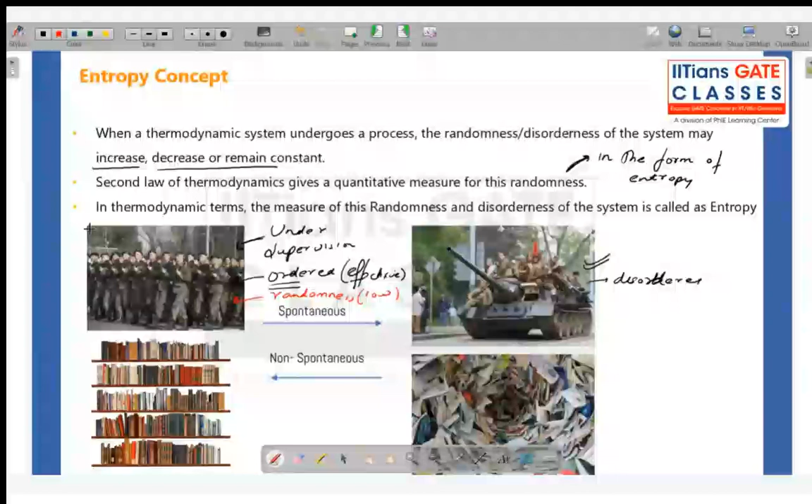But when this system — if I assume this is a system — and when I leave this system to do a natural process, so after the end of this process, the randomness increases. Randomness, random, okay, just one second. Randomness increases. So you see, after any natural process, whenever a system goes through a natural or spontaneous process, its randomness increases.

So it becomes less effective. It becomes less effective, okay. After a process, when its randomness increases, it becomes less effective.

Now also, you see, if it is a bunch of books — someone has put enough work to arrange this book in a very particular order. So here the randomness is really low, okay, so this system is very effective. If you just walk into this library and you know that you want this book, for example, you want the book The Alchemist, okay, so what you will do — you know what kind of genre it is.

You will go to that genre, and then alphabetically you can choose this particular book. But now, if I leave you in this library for 1 year without any supervision, naturally what will you do? You will pick up a book, throw it somewhere. You will pick up another book, throw it somewhere. So after 1 year, naturally, what will happen? Spontaneously, you will come from this stage to this stage.

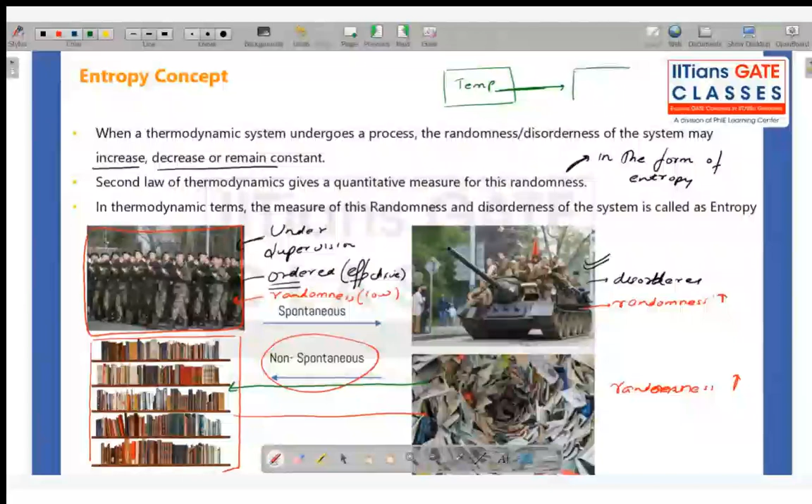But now, let's say it undergoes a process. Here you have taken out some work, but after this process, its randomness or entropy increases. That means now, because randomness has increased, higher entropy means less work output, less effective energy, less effective system. If I say a system has higher randomness, that means the molecules are very randomly arranged. There is no particular order. There is very high disorderness, and therefore it's really difficult.

So what is randomness? Look, this is one system, and all the molecules are arranged like this, maybe a little bit like this, little bit like this. Basically they are all arranged in a particular order. But if you have a system something like this, one molecule is like this, one is like this, one is like this - here molecules are very randomly arranged. So this is higher randomness, means higher entropy, means less effective energy. Here randomness is low.

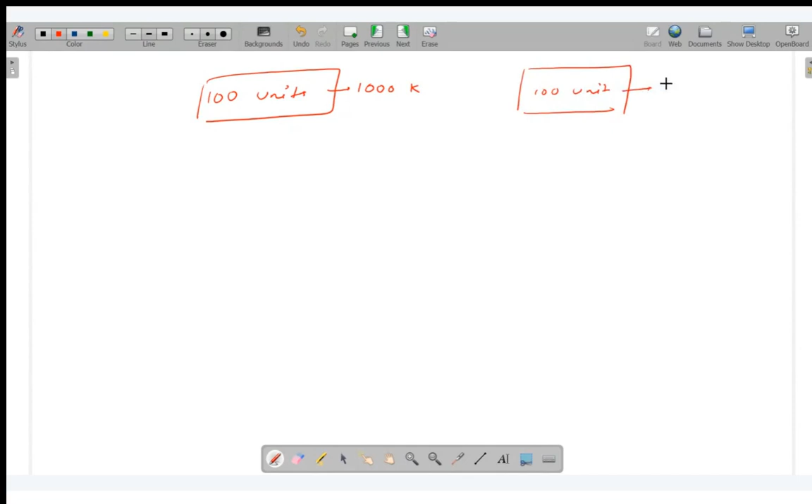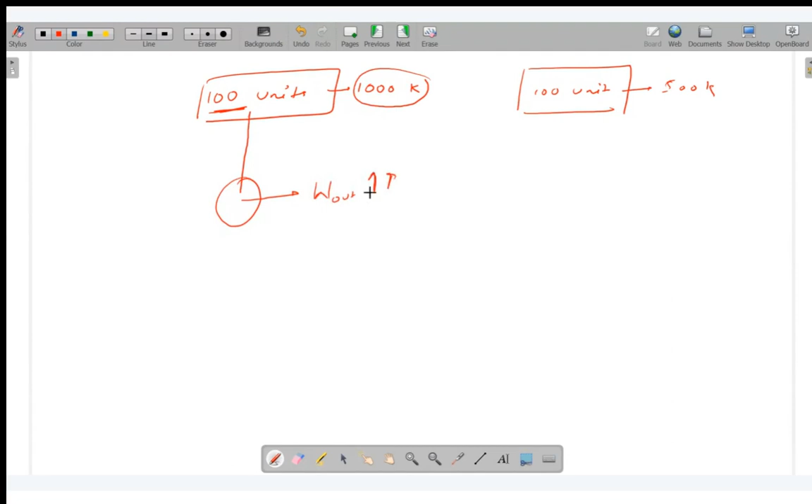Okay, so for example, if you have 100 units of energy at 1000 Kelvin and 100 units of energy at 500 Kelvin, because the temperature is higher, the same amount of energy will give you more work output. This work output will be higher - this is Q out, this is Q in. So this energy will give you less work output compared to this one. Here temperature is low compared to this one, but amount of energy is same.

So when any energy gives you higher work output, it is more effective - basically you are able to extract more useful work out of it. So if this work output is more, that means Q losses will be less anyway, and here Q out will be more. Got it?

This basically is what the second law tells you: that the energy at higher temperature is more effective. And I think we proved this as well somewhere, although I have not covered it. Let me just give me 1 second, and even this one tells you, see, Q1 by Q2. Let me just explain this once again.

Okay, so you see, do you remember your Carnot engine? Abhi, we have not studied entropy, but let me just give you some idea. So this is a TS diagram. Till now, we have only discussed PV diagrams, right? But in the Carnot cycle, we have seen a TS diagram. So what was the TS diagram in the Carnot cycle? This was your TS diagram. Remember?

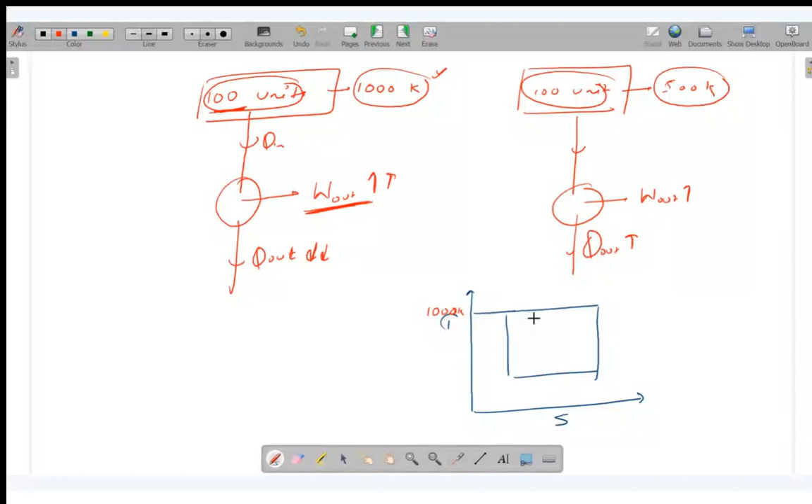Now, see, this is some temperature, 1000 Kelvin. Now, this 1000 Kelvin, how much work can it give you? So what is work? Let's say this is your 300 Kelvin. So this area enclosed by this cycle is the work output, the net work. And it is also equal to Q net. Can you make sense out of it?

Yes, no? Then I'll explain more. Okay, so W net is equal to Q net. Why? Because, you see, this is your Q in, this is your Q out - I hope you remember this diagram - and this is W out, this is W in. Now, if you go to the first law of thermodynamics...

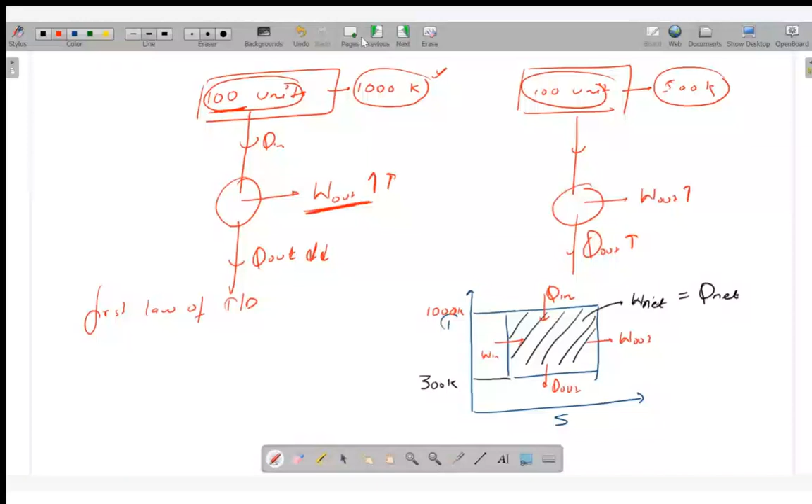So I think, let me explain it more elaborately so that any doubt could be cleared.

So this is your TS diagram. And if you remember, it was like this. Okay, assume it is a horizontal line. I see it can have some slope, but for this I assume it is a horizontal line.

Now, if you remember, this was your Q in. So anything below this curve is basically your Q in. Everything below this curve is Q in. This much heat you are giving to your engine.

Now, anything below this is Q out. So this is your Q out. What is your Q out? This is your Q out. So what is this area under this cycle? It is Q net, which is also equal to Q in minus Q out.

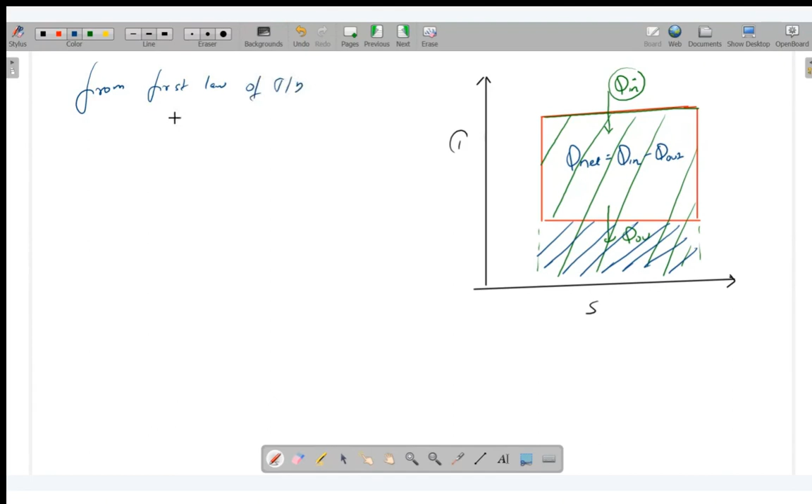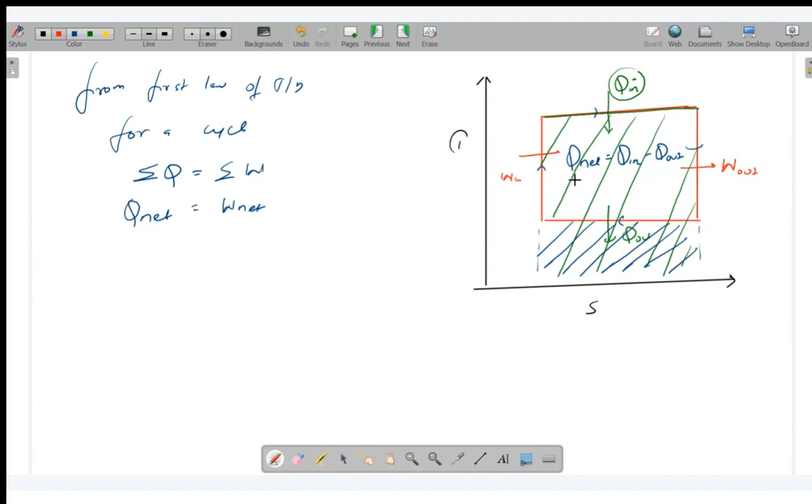Now, from the first law of thermodynamics, for a cycle - it's a Carnot cycle - what do we understand? Summation of Q is equal to summation of W. So Q net, this area which is Q net, is also equal to work net. Where, if you remember, this is your work turbine, which is work output, and this is your work input. So this area is also telling you net work, which is W output minus W input. This much is clear, yes or no?

Now, coming to your question: let us say this temperature is equal to 1000 Kelvin. And this is your surrounding temperature, which should be the temperature at which you are rejecting heat. Now, if your surrounding temperature remains fixed - this is lower temperature, this is higher temperature - let it remain fixed. Now the work output is basically the area enclosed. So all this is your work out, the net work. So if T higher is equal to 1000 Kelvin, then the work output, work net, is basically this area.

Now, if you take this heat transferred at some lower temperature - let us say you are transferring heat here, same heat, Q in is the same amount of heat - transferring at, let us say, temperature equal to 500 Kelvin, then tell me what is the net work. So now this area is net work. So if T higher is equal to 500 Kelvin, then net work is this.

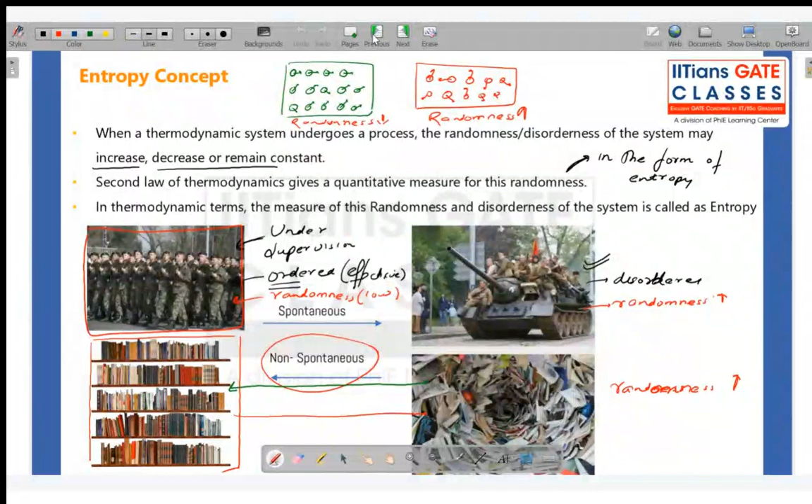Okay, so let's move ahead. I hope you understand what is entropy. Entropy is the measure of randomness. Randomness is basically when the molecules are very randomly arranged - it is less effective energy. The measure of this randomness in quantitative terms is called entropy. I hope this much is clear.

Now, the first thing that is explained about entropy is Clausius theorem. So Clausius theorem basically tells you that for a... just 1 second.

So Clausius theorem tells you that for a reversible cycle, the cyclic integral of dq by t, only reversible cycle I am talking about, is equal to 0. So for a reversible cycle, this ratio dq by t is equal to 0. Now you tell me, if you remember, cyclic integral of what is equal to 0. Do you remember this? We have discussed cyclic integral of what is equal to 0.

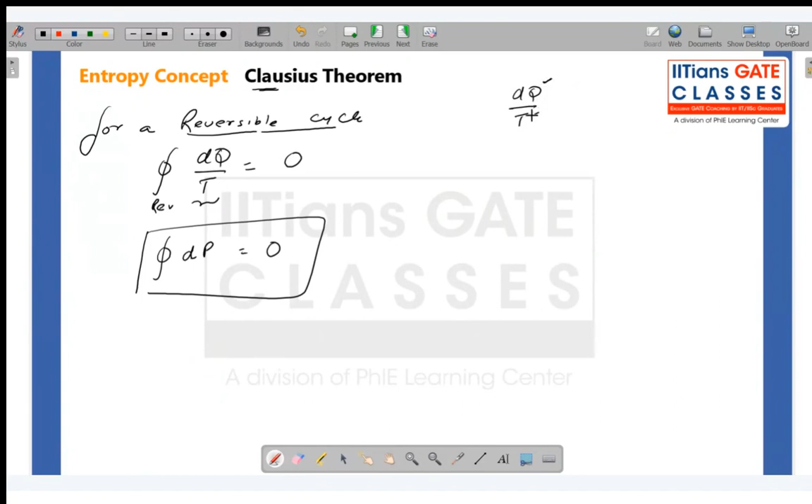So cyclic integral of any property is equals to 0. This dq by t term is a point function that depends on the heat transfer and temperature of the system - how much heat transfer you are giving at what temperature. We saw that cyclic integral of dq by t is 0, that means this term is a property.

This term is a property, and we gave this property a name called entropy. So this property is basically dq by t, and we have given this name as entropy. So entropy is a property, and the cyclic integral of dq by t is equals to 0.

So for a reversible cycle, change in entropy is equals to 0. This is your Clausius theorem, and again we are only talking about reversible cycle, not irreversible - only reversible cycle. Now mathematically, for a reversible cycle, ds is equals to dq by t, and when we talk about a cycle, this ratio or ds is equals to 0.

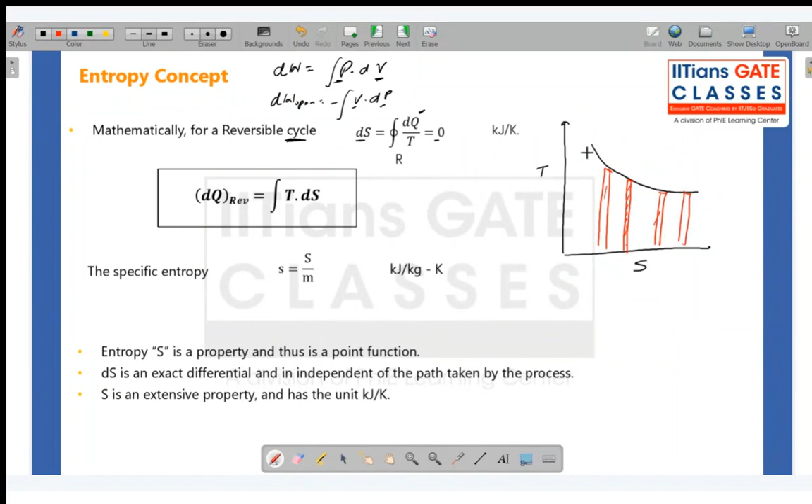I can draw a TS diagram. This is the PV diagram we draw to explain work transfer; here I can draw a TS diagram, and I can take a very small temperature and a change in entropy here. Similarly, I can do it infinite number of times, and I will get this area under the curve. So this area under the curve is basically the integration of small temperature and ds, which from this equation equals dq.

So heat transfer is given by the area under the curve on the TS diagram, when extended on the entropy axis. This is what heat transfer gives you. You can also understand this by this diagram: if this is the curve, everything below it given on the entropy axis is giving you this heat transfer. Similarly, area under this curve is giving you Q out. So heat transfer is given by the area under the curve when extended on the entropy axis.

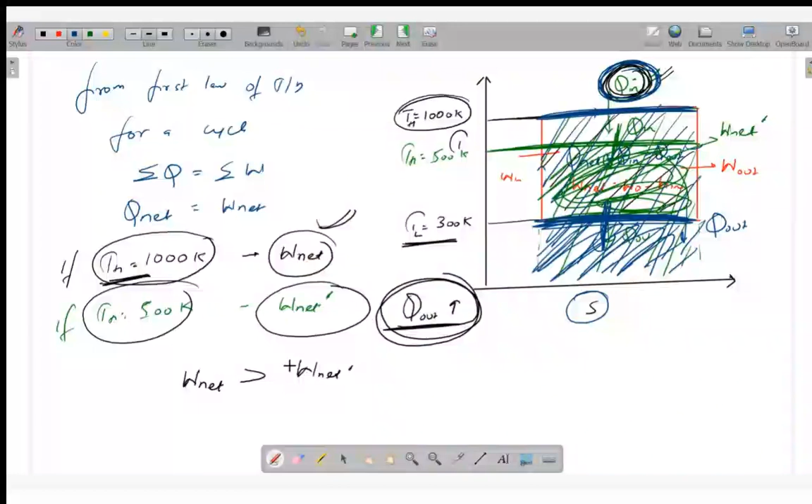I hope you can also tell me how we can show the closed system work transfer on a PV diagram - what is that area? Do you remember, work transfer for closed system, area under the curve on what axis? Closed system on volume axis. How about open system - on pressure axis, area under the curve when extended on pressure axis. Very nice, I'm happy to see that you remember things. So this will not be very difficult for you, because we had the same kind of equation, right? I don't think it needs any explanation.

Now, specific entropy is basically entropy divided by mass. Now I have already explained entropy is a property because its cyclic integral, we have seen, is equals to 0, and therefore it is a point function. Now change in entropy is an exact differential, and therefore again it is a property, a point function, and it is independent of the path taken by the process. But it is an extensive property and has the unit kilojoule per Kelvin.

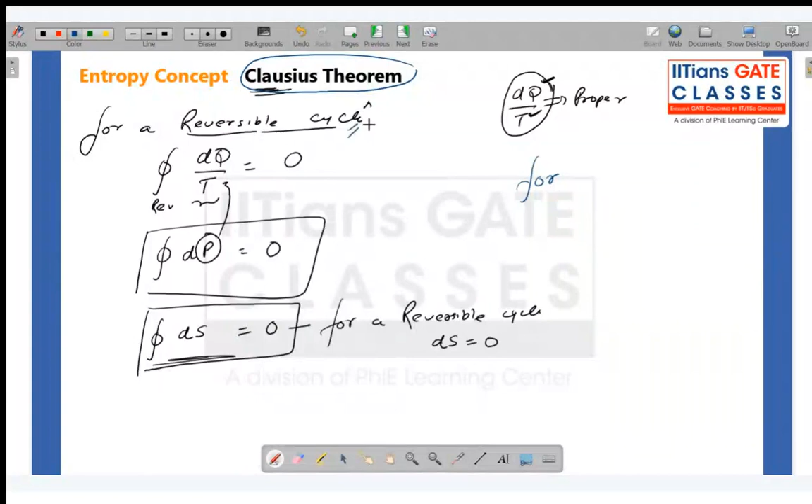Clausius inequality basically tells you that dq by t for a cycle is always less than or equal to 0. When I told you earlier, I said that for a reversible cycle, dq by t is equal to 0. Now, Clausius inequality is an extension of Clausius theorem - it includes dq by t for reversible cycle as well as irreversible cycle.

Reversible cycle I have discussed in Clausius theorem, but here for a cycle, this is what we have already discussed: Clausius theorem has told you that for a reversible cycle, cyclic integral of dq by t is equals to 0, and therefore I can say change in entropy, ds, is equals to 0.

Now, if you have an irreversible but possible cycle, then the cyclic integral of dq by t is less than 0, so the cyclic integral of ds is less than 0. If it is an impossible cycle, then the cyclic integral of dq by t is greater than 0. So it is a very important question: when do you say the cycle is impossible?

When I started the second law, I told you the first law's limitation was this, but it is the second law that explained things. This is one application of the second law: first law will do energy conservation and tell you it's fine. But then if you check the ratio dq by t, and if it is greater than 0, you will understand that this cycle is not even possible. So it puts a restriction on the cycle, and similarly for a process also it puts a restriction. Later we will see.

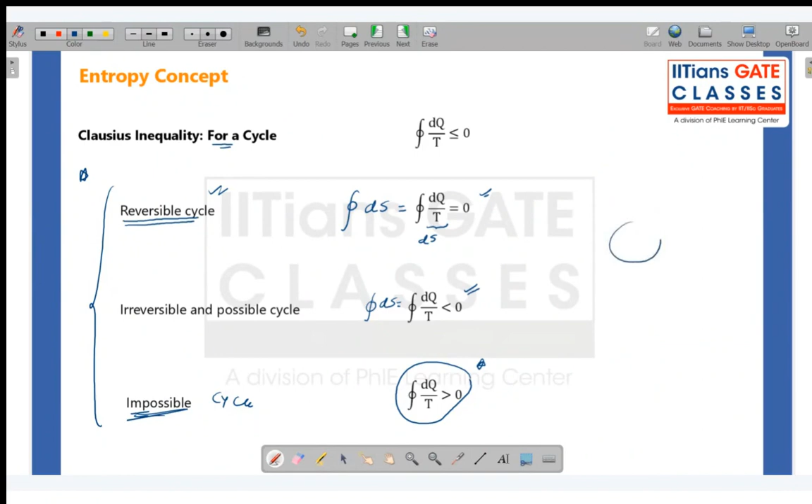So for example, if I come up to you and say I have designed this engine in which I am giving you some Q1 and some work output is getting produced, okay, and Q2. Now I'll say my efficiency is, let us say, 15%. So first of all, I'll do energy balance: Q1 is equal to W out plus Q2. Let us say it is satisfied. Then I'll go one step ahead.

I will do the cyclic integral of dq by t. Q1 is going inside, so it is positive: Q1 by T1, plus Q2 is going out, so I will take minus Q2 at T2. If this summation comes out greater than 0, I will say that it is an impossible cycle, even though the first law is satisfied. Got it?

Now, what about the process? The cyclic integral of dq by t is equal to the cyclic integral of ds, but for a cycle it is 0. But when I only talk about a process, ds is not 0. So simply for a process, ds is greater than or equal to dq by t.

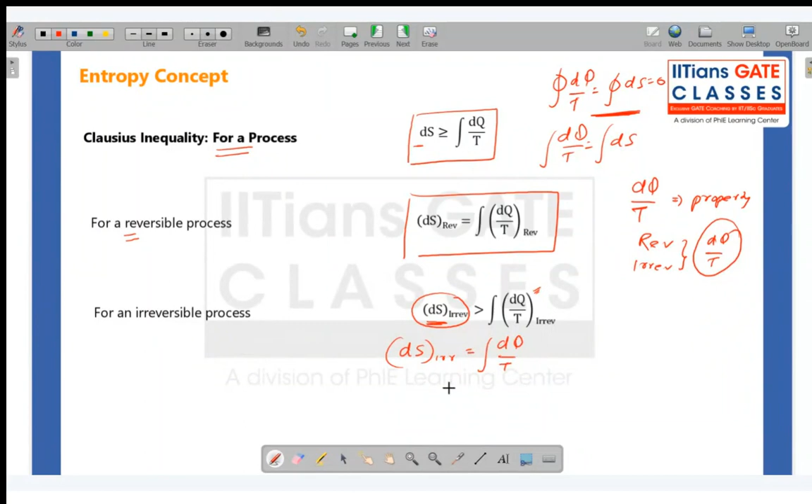dq by t is a property, and therefore it does not depend on the path, right? Whether it is a reversible path or irreversible path, this ratio of dq by t will not change as long as the initial and final conditions are the same. So I can directly write ds is equal to the integral of dq by t, without worrying about reversible or irreversible, because it does not matter. But you see, the left hand side is greater than the right hand side. That means if I put an equal sign here, I have to add something, and that is entropy generation.

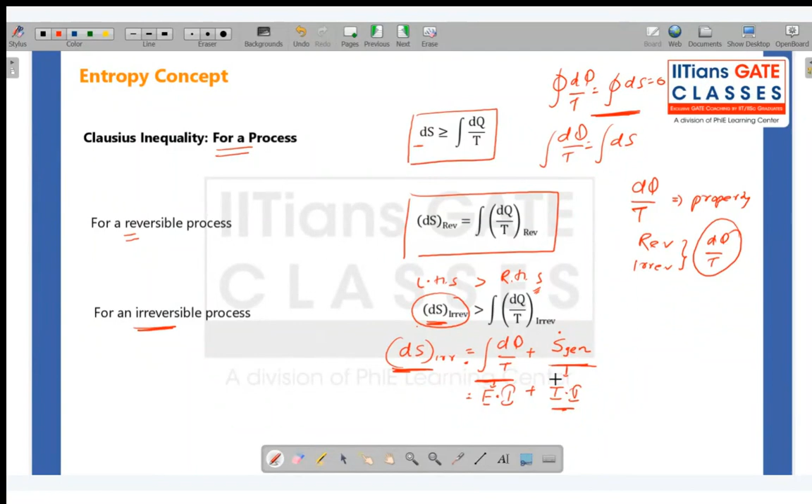Which comes because of the irreversible process, generating inside the body. So here we say, this is external irreversibility, and this is internal irreversibility. Okay, these are two terms. So for an irreversible process, total entropy is basically dq by t plus entropy generation, and this is called external irreversibility, this is called internal irreversibility.

So how do you explain external and internal irreversibility? The entropy of any closed system can increase in two ways. The first is external irreversibility, meaning external of what? For example, you have this system. Now, when I am transferring some heat from outside, this is an external interaction, coming from outside.

So the entropy that occurs because of this external heat transfer is called external irreversibility. How do I explain this? Change in entropy because of external irreversibility equals dq by t, integral of dq by t. Now what happens is, it is coming from outside of the system.

Now, inside the system, there will also be some processes going on. For example, piston is moving, there is some friction, some rotational or rotary parts or something else. The most common phenomena of internal irreversibility is friction or viscosity. There are fluid layers inside, and when these fluid layers flow one over the other, there is viscosity, which is also a friction, a resistance there.

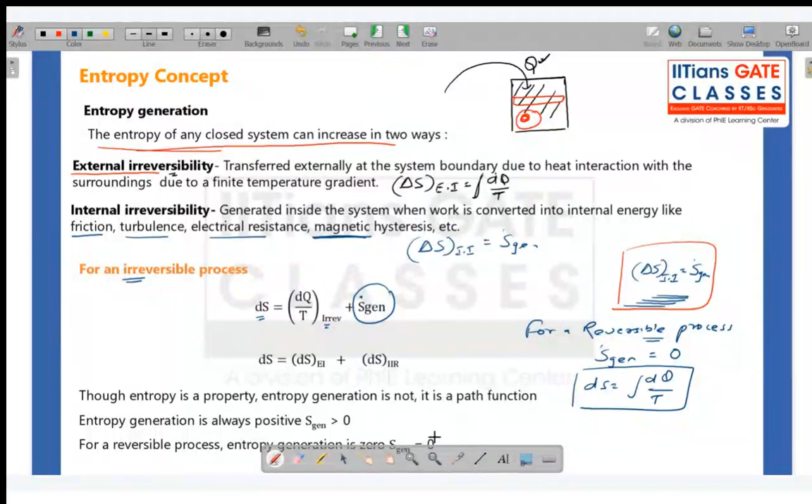So now, though entropy is a property, entropy generation is not, because it depends on the path. So entropy generation is not a property, it's a path function, and entropy generation is always positive. Either it is 0 for a reversible process, or it keeps increasing, because friction will always keep adding to it. So it is always greater than or equal to 0, and for a reversible process, entropy generation is 0.

Okay, so is this clear? Yes.

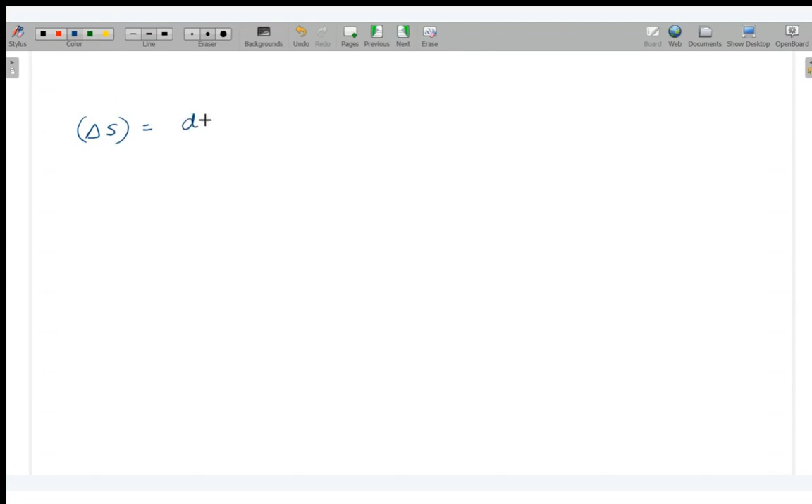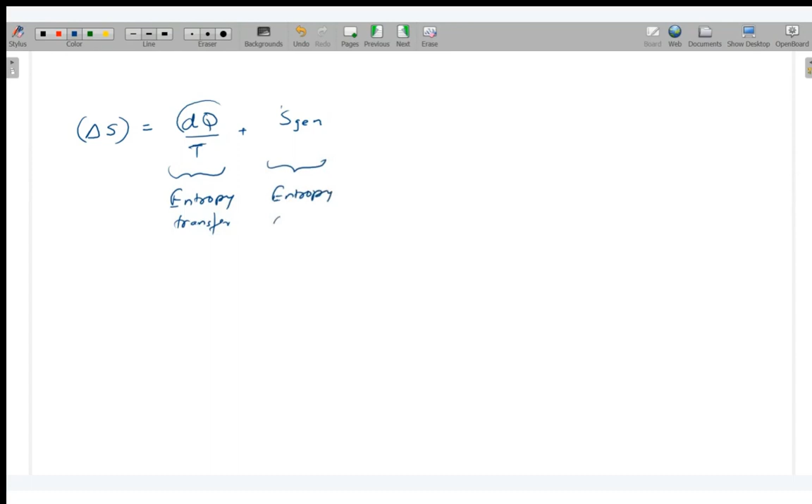Yes, so you see, look, now we have a system. Total entropy equals entropy because of heat transfer plus entropy generated inside the system. Now, this is called entropy transfer, and this is entropy generated. This is called external irreversibility, and this is called internal irreversibility.

Now, any irreversibility that comes from outside is called external irreversibility. If you have a system, heat transfer only happens when it crosses the boundary. So if heat transfer is coming from outside to inside, you are doing some heat transfer dq, and it happens from a certain temperature, for example your outside temperature is 30 degrees Celsius, so that is your T. So dq by T is bringing some irreversibility inside the system, but from where? From outside. When this heat transfer happens, some irreversibility or entropy is changing inside the body.

And why is it happening? Because of this heat transfer. And where is this heat transfer coming from? From outside, externally. And that is why it is called an external irreversibility.

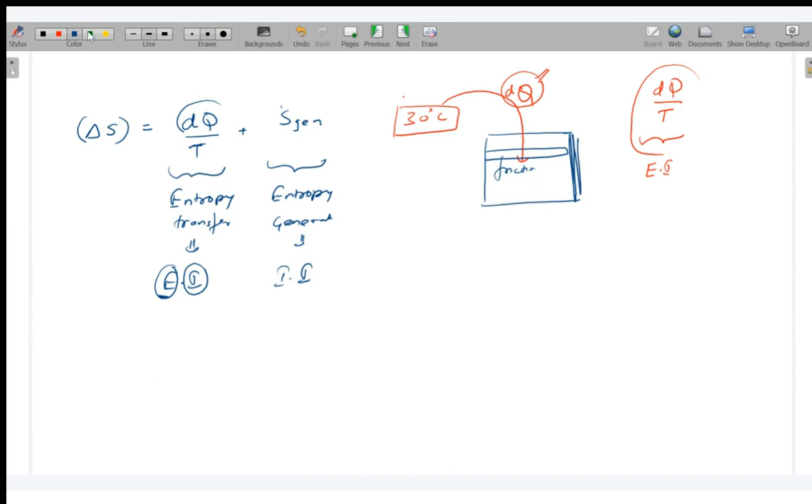Now, inside the system, there could be friction. For example, piston is moving up and down, so friction is happening. Or fluid is flowing, water or some fluid, and there is viscosity between two layers of this fluid. So that is also a kind of irreversibility, but it is happening inside the system, not coming from outside, it is generated inside the system.

So whatever increase in entropy happens because of this friction or viscosity is called entropy generation, and because it is happening internally, it is called internal irreversibility. The entropy increase because of this is called entropy generation. Is it okay?

Okay, so let's move ahead. Yes.

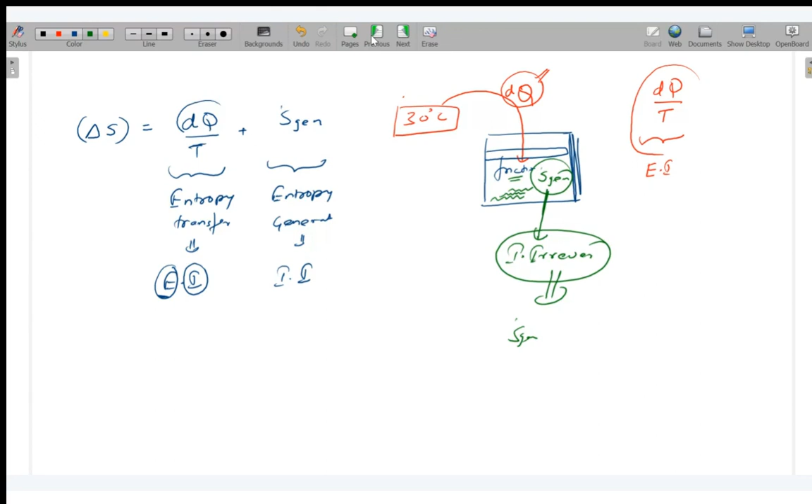Now be very cautious, because now we are starting the formulas. Then there will be a lot of formulas, I am already telling you, so make up your mind for that. But I have divided the formulas in such a way, and I will try to explain it so that it is very clear which formula is applicable in which case.

Now, entropy change in a system undergoing a reversible process. So we are talking about entropy change in a system, first of all. Mark the words: in a system, when it is undergoing a reversible process. So two points are very important here: system and reversible process.

So you are going from I to F. But how are you going? You are doing a reversible process, specifically reversible isothermal heat transfer. What is an example? For example, you have a thermal energy reservoir, and you are transferring heat at this particular temperature.

So whatever heat you have transferred, the entropy of this thermal energy reservoir will change. How much will it change if you need to calculate? So this time, what is this? This is your system. So this is your system, you see, and this heat transfer is reversible, so this is also satisfied.

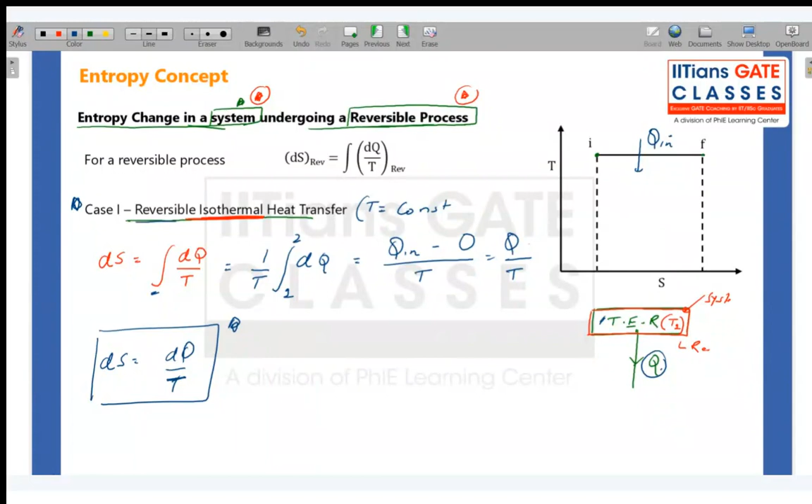Now let us come to case 2. Remember case 1 was reversible isothermal heat transfer. Now case 2 is reversible non-isothermal heat transfer. So now the temperature is changing.

For example, if you see this is one body and it is transferring some heat. If the temperature was earlier T initial, because of this heat transfer its temperature is changing. This is your initial temperature T initial, and this is your final temperature. Some heat transfer is happening, Q in or Q out. So if these kind of systems are there when there is non-isothermal heat transfer, then what will you do?

So now you see, ds is equals to dq by t. Now here temperature you cannot take out. So what will you do? Basically I have to convert dq in the form of properties, and then only I will be able to integrate it. So there will be two cases here for reversible non-isothermal: solids and liquids, and ideal gas.

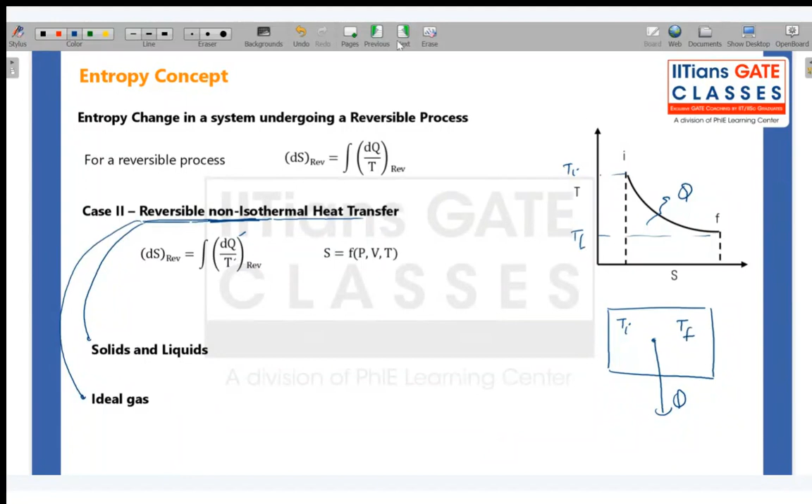Let us start with solids and liquids. Again, remember we are still talking about system and reversible process, but what case? Non-isothermal heat transfer. So now if you remember, dq for solids is equals to du plus pdv, or dh is equals to mc dt.

Do you remember? dq is equals to du plus pdv, dq is equals to dh minus vdp. So this got cancelled, and dq is equals to du is equals to dh as well. We have discussed this for solids and liquids when we were talking about heat transfer in that particular session. So dq is equals to mc dt.

Now I can substitute dq here. So ds reversible, look, now I cannot take temperature out, because temperature is not constant. So I will write mc dt by t. But mass and specific heat is constant, so it is integral of dt by t from initial to final. So basically mc ln of t final by t initial.

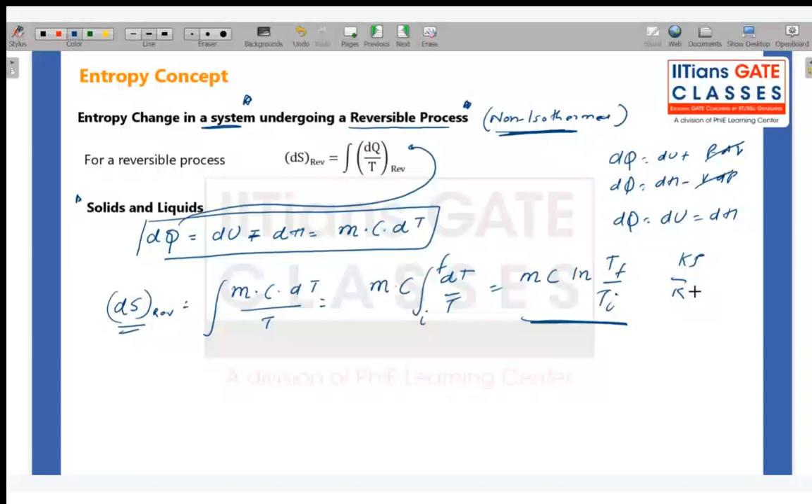What will happen if we have an ideal gas? Now, ideal gas dq is equals to, this is my general equation. This is first law for closed system, and this is first law for open system. So I have to put it one by one. Once I put this, then I'll put this. I will get two formulas, and depending upon what is given to me in question, I can use either of them. There is no right or wrong formula.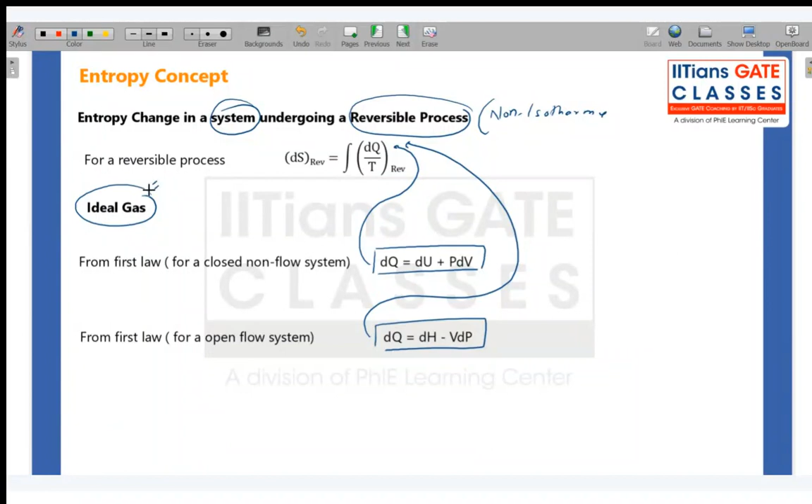If you have an ideal gas, if you have a system that is undergoing reversible process, and what kind of process? Non-isothermal heat transfer, and you have an ideal gas. So you can use these two formulas which we are going to define now. Let us define the first one. Let me substitute this dq here. So I can write ds is equals to du plus pdv by t.

du is equals to mcv dt by t. How about p by t? So you see, we have ideal gas, so if we have ideal gas, I can write PV is equals to mRT. So P by T is equals to mR by V. So I can write mR dV by V. Any doubt in this step? Anyone? du is equals to mCV dt, and P by T is equals to mR by V. Any doubt, anyone? Is it clear to everyone?

Okay, okay. I want more answers. Is it clear to everyone?

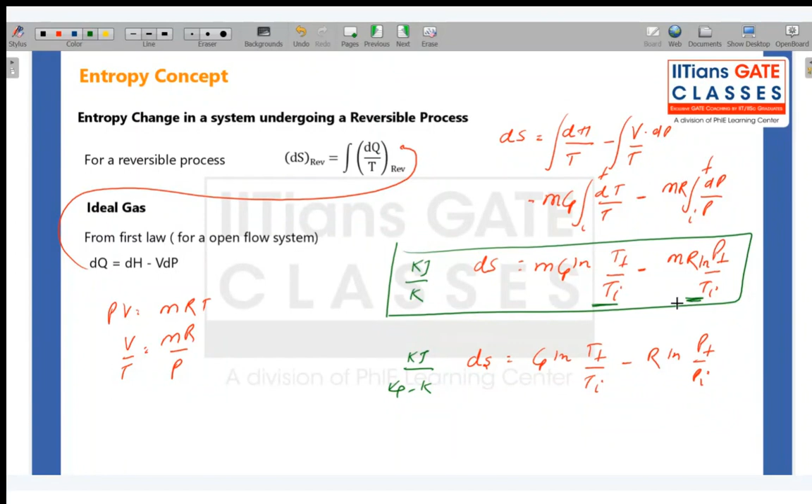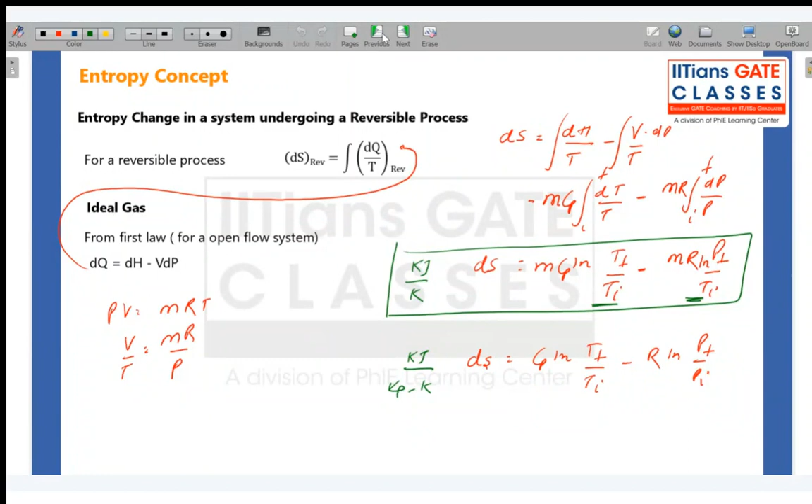Got it, everyone? Any doubt, anyone? This one? This one. So are we clear, everyone? Are we clear till now? I know there are quite a few formulas, but I hope we are clear.

Now let me give you a brief history of what we have done till now, then we'll come back. I don't want to burden you with all these formulas. So Clausius inequality: we have seen that for a cycle, dq by t is always less than or equal to 0. So if you have a reversible cycle, cyclic integral of dq by t is equals to 0. If you have an irreversible cycle, cyclic integral of dq by t is less than 0.

For a process, ds is greater than or equal to dq by t. So if you have a reversible process, then ds is equals to dq by t, and if it is irreversible, then ds is equals to dq by t plus entropy generation.

Now, entropy change of a system. If you have a reversible isothermal process - for example a thermal reservoir, or also phase change is happening, meaning heat transfer is happening but the temperature is same - then you can use this formula. But if you have a non-isothermal heat transfer, if solids and liquids are there, you can use this formula, or if it is ideal gas, you can use any of them.

So this is what we have discussed till now. Got it? Now let us move back. So next is increase in entropy principle.

Increase in entropy principle basically says that the entropy of an isolated system - now what is an isolated system? It is universe is an isolated system. So the entropy of an isolated... and what is universe? Universe is basically system plus surrounding.

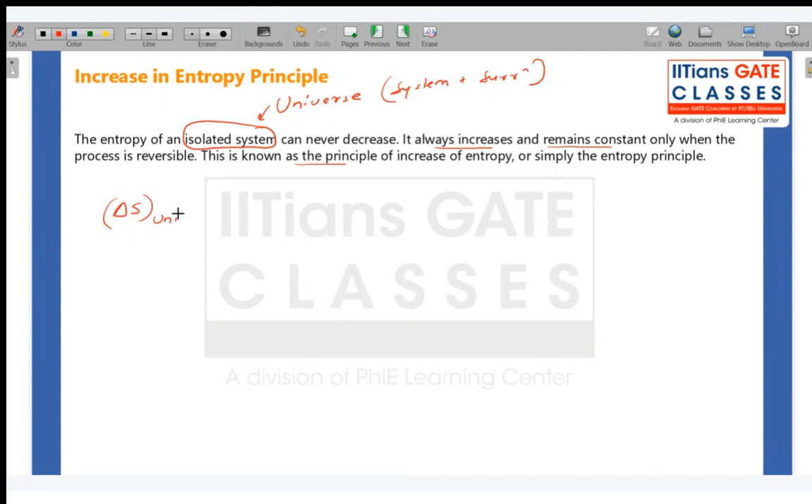So the entropy of an isolated system can never decrease, it always increases or remains constant only when the process is reversible. So it is called the principle of increase of entropy or entropy principle. So simply it is telling you that change in entropy of the universe is always greater than or equal to 0. And there is a lot of psychology also which goes behind this. So this is what we have been seeing in all the processes that we do on a daily basis - I'm not talking about power plants working, and I'm not talking about very energy intensive processes.

Whatever we do in our daily life, from moving our hand, cooking our meal, or doing anything, we release some heat, or there is friction involved. Entropy of the system equals 0 if you have a reversible process, but there is no truly reversible process. So change in entropy of the universe will be equal to 0 for reversible, but if it is an irreversible process, then dS of universe is positive, greater than 0. It always increases. So whatever you do daily, even moving your hand, cooking, or walking, you are doing a process, and some heat is released to the surrounding, increasing the entropy of the universe.

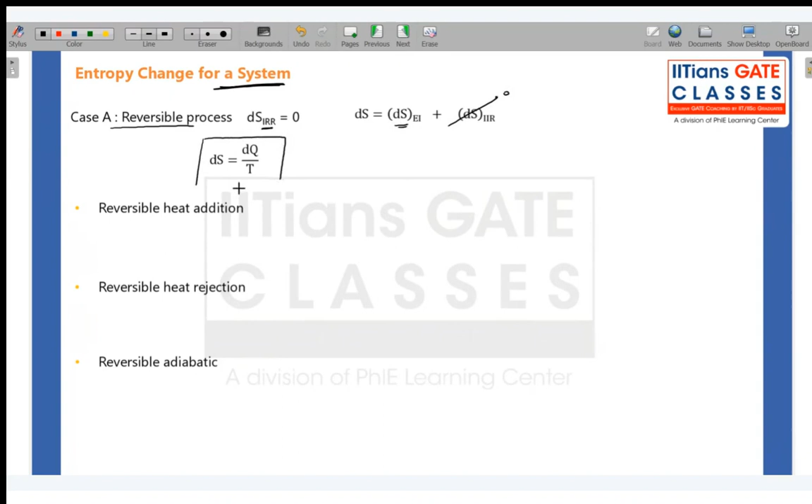First of all, let us talk about reversible processes. As we know, entropy generation, or internal irreversibility, equals zero for reversible processes. Only external irreversibility is there. So this is our formula for a reversible system.

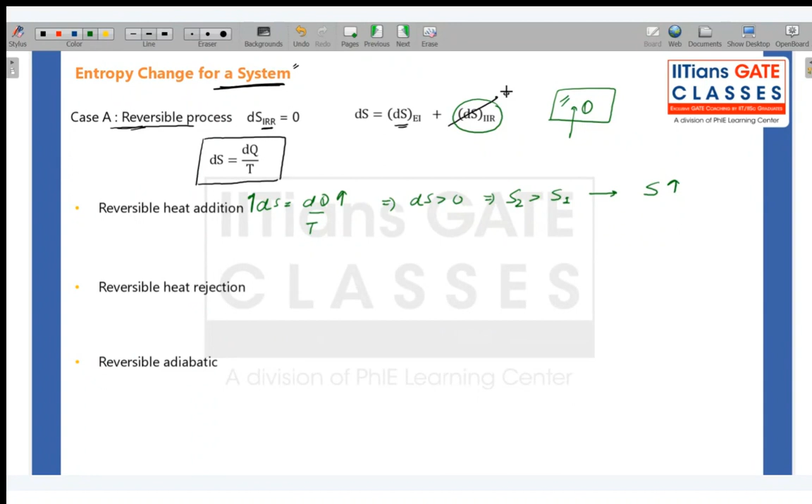Now, if I am adding heat, what will happen? dS equals dQ by T. Now you are adding heat, meaning the numerator is increasing, so entropy is also going to increase. In this case, dS is greater than 0, or S2, the final entropy, is greater than initial entropy, so entropy is increasing. Whenever you are adding heat to a system, that system's entropy will increase, for reversible processes where there is no friction, no viscosity. This internal irreversibility is generated due to friction, viscosity, magnetic hysteresis, resistances, but for reversible processes we assume they are all zero, so entropy generation is zero for reversible.

But in an irreversible process, it is non-zero. Now, what about heat rejection? When heat is rejected by any system, again dS equals dQ by T. Now you are rejecting heat, so dQ decreases, meaning entropy also decreases. So dS is less than zero, meaning final entropy is less than initial entropy, and entropy is decreasing.

What about reversible adiabatic, which is also called isentropic? Why is it called isentropic? Because adiabatic means no heat transfer, so dQ is zero. So dS is also equal to 0, meaning S2 equals S1, meaning entropy equals constant, and that is the reason the reversible adiabatic process is called an isentropic process. Is it clear?

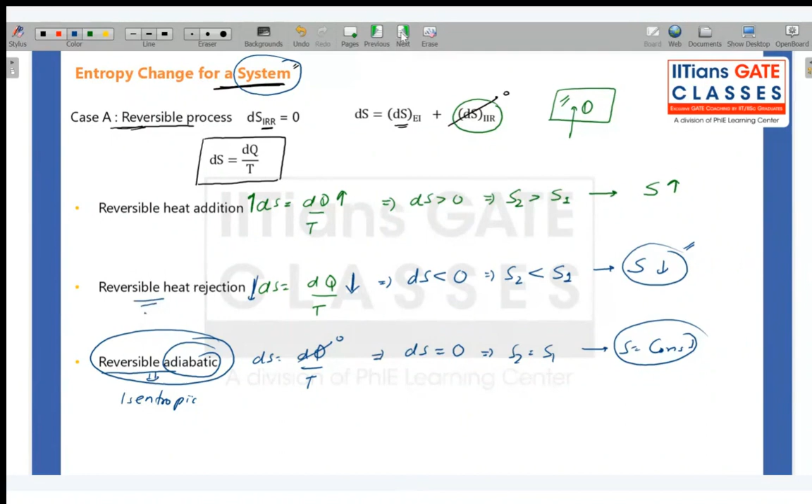Let us say you have a system and this is rejecting heat, Q out. So now ds is equals to dq by t. Now it is rejecting S, so ds is decreasing. So S is decreasing. But this heat is going where? It is going to surrounding.

So for surrounding, it is Q added. So if I say ds of surrounding, for surrounding it is also dq by t. Here heat is added, so this is increasing, and therefore this is also increased. So S is increasing. Now S of system, entropy of system is decreasing, entropy of surrounding is increasing, and this will be happening in such a way that entropy of universe, which is equals to entropy of system plus entropy of surrounding.

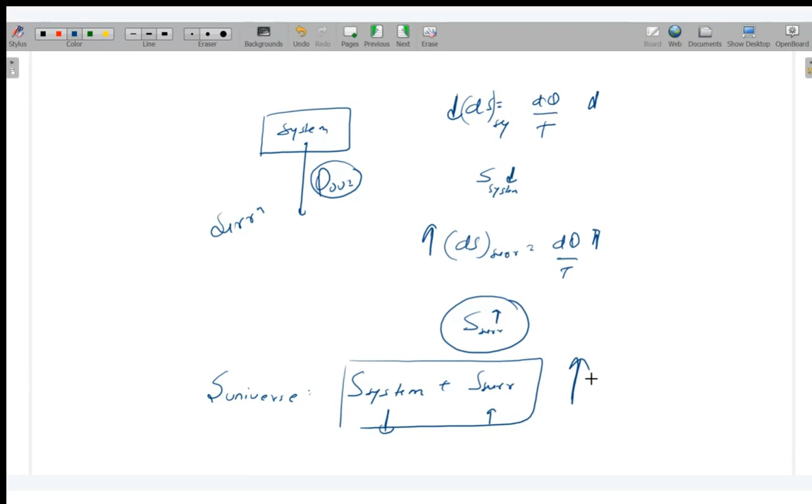So one is decreasing, one is increasing, but the combination of the two will always increase. So I'm talking about universe there, that is why I was focusing here. I'm talking about universe, and here I'm talking about only system. Similarly here, if you are adding heat, the entropy of the system is increasing, but entropy of surrounding will be decreasing, and the combination of them will always increase. You can't do anything. Is it clear? Now is it clear?

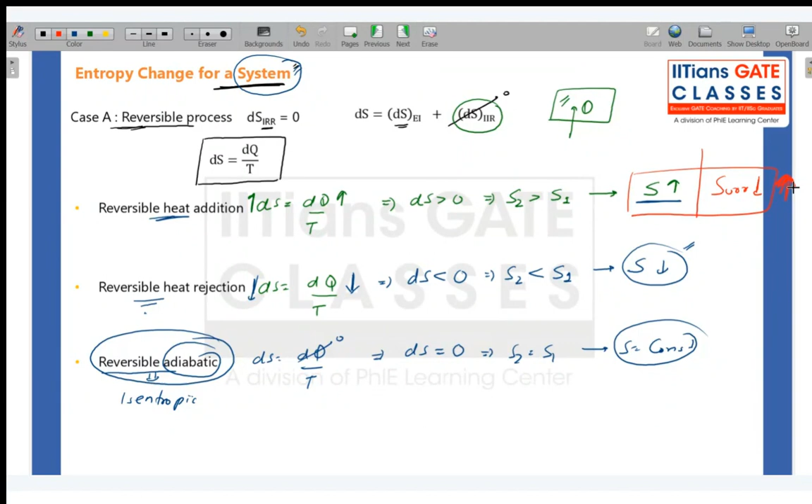Okay, now next is: entropy change of a system undergoing reversible process either may increase. Again, I am talking about system here, and it is a very frequently asked objective question. The entropy of the system is always positive, may increase, may decrease, or may remain constant. Actually, entropy of the universe they will ask, because for system there is more than one answer. So basically, entropy of the universe can never decrease, but of the system it can increase, decrease, or remain constant. Entropy change for a reversible adiabatic process is zero, and that's why it is called an isentropic process.

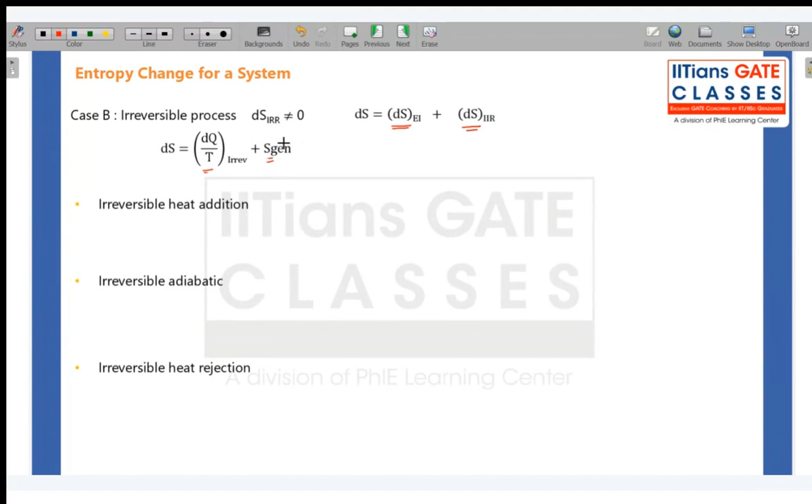Now, next is irreversible process. Now here you have both external irreversibility and internal irreversibility as well. So ds is equals to dq by t irreversible plus entropy generation. And when I explained entropy generation, I told you that it is always positive, because of friction or viscosity it is always added, it is generated. It is generating inside the system, it is not going anywhere. So it is only generated, and therefore it is always positive. Entropy generation is always positive.

Okay, so now if that was reversible heat addition, this is irreversible heat addition. So ds is equals to dq by t plus entropy generation. Now you see, you are adding heat, so because you are adding heat, this is increasing, and this always increases, it is always positive. So basically, change in entropy will be positive. This is positive, this is positive. So ds is greater than 0, and S2, final entropy, is greater than S1. So basically, entropy increases. What about irreversible adiabatic?

ds is equals to dq by t plus entropy generation. Now you see, it is adiabatic, so this term is 0, but entropy generation is always positive. That means it will also increase. So again, ds is greater than 0, S2 is greater than S1, and therefore entropy increases.

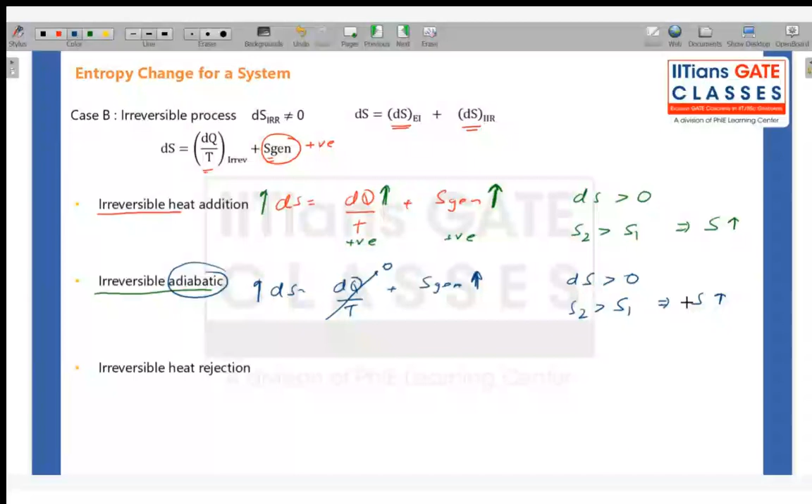Never get confused about whether an adiabatic process is isentropic. It is adiabatic, but it is not isentropic here, entropy change is not equal to zero, entropy is not constant. It is adiabatic, but entropy is changing. So adiabatic process does not mean isentropic process. Be very clear: adiabatic does not mean isentropic. Reversible adiabatic means isentropic.

Now what is happening with irreversible heat rejection? For irreversible heat rejection, we have ds equals dq by T plus entropy generation. So we are rejecting heat, so ds equals negative plus positive. Because of this, entropy is decreasing, and because of entropy generation it is increasing. So what will be the overall change in entropy? It depends on which one is dominating.

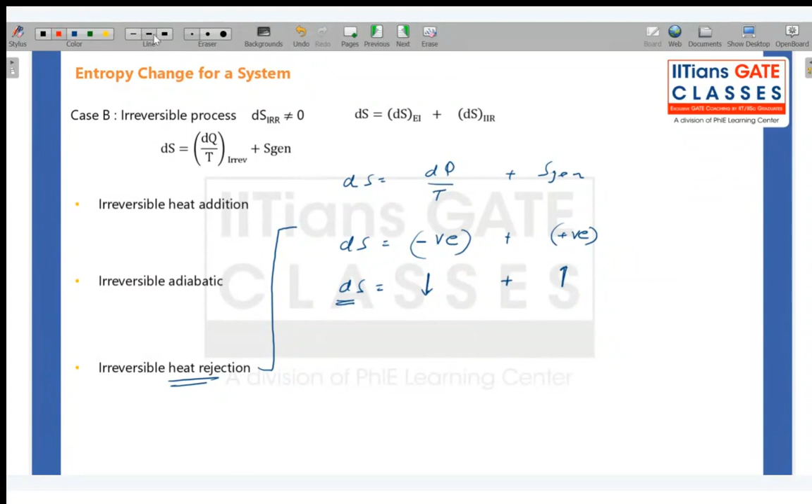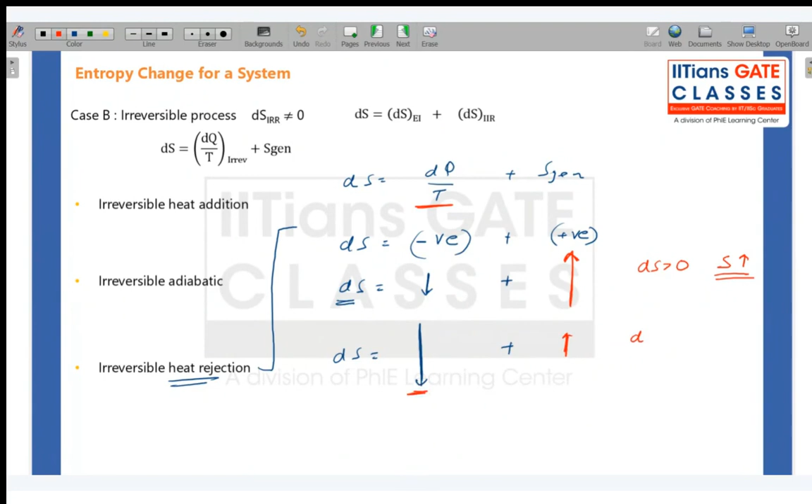Let us say the decrease of entropy due to heat rejection is less, but the increase in entropy because of entropy generation is more. Then ds is positive and entropy increases. But if the decrease is more and the increase is less, that means ds is less than zero and entropy decreases.

The final case that can happen is that the decrease in entropy equals the increase in entropy. So here ds equals zero and entropy is constant, and this is also called an isentropic process.

Someone was asking me earlier, I don't remember the exact question, but a lot of time people confuse isentropic and reversible adiabatic. Every time they think if it is isentropic, that means it is reversible adiabatic. No.

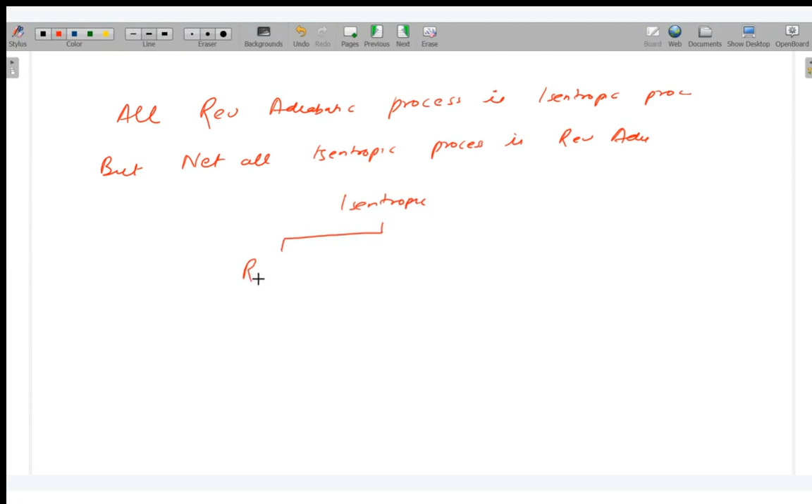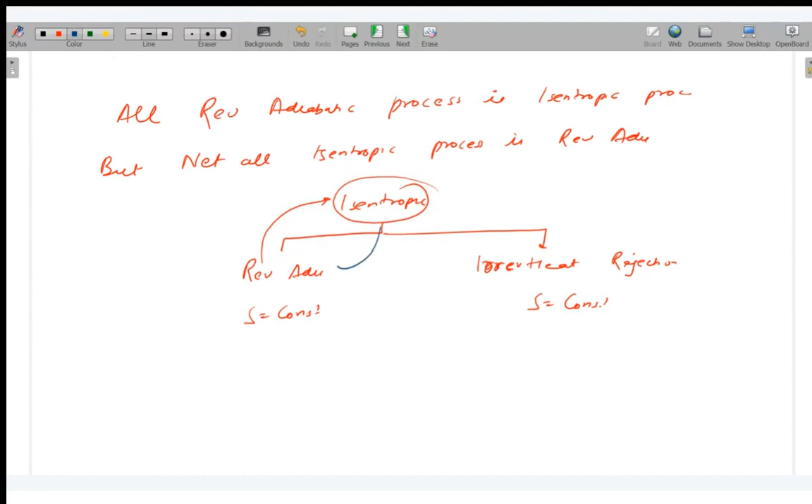Let me write it another way: all reversible adiabatic process is isentropic process, but not all isentropic process is reversible adiabatic. So isentropic can happen in two ways: if it is reversible adiabatic, or if it is irreversible heat rejection, here also entropy is constant. So reversible adiabatic process is always isentropic, but isentropic process can be either reversible adiabatic or irreversible heat rejection.

Is it clear, everyone? Or any doubt, if you have, ask. Guys, come on, reply. Is it clear, or if you have any doubt, then go ahead and ask. Okay, okay, thank you.

Entropy change of a system undergoing a reversible or irreversible process may increase, decrease, or remain constant. And a reversible adiabatic process is always isentropic, but the reverse is not always true.

So let us come to entropy balance. What do you mean by entropy balance? Like we did in the last slide, I explained that the reversible adiabatic process is always isentropic, but the reverse is not true. Reverse not true means an isentropic process is not always reversible adiabatic—it can be reversible adiabatic or irreversible heat rejection. So a reversible adiabatic process is always isentropic, but you cannot say isentropic process is always reversible adiabatic, because there could be a case where it is not reversible adiabatic but still isentropic.

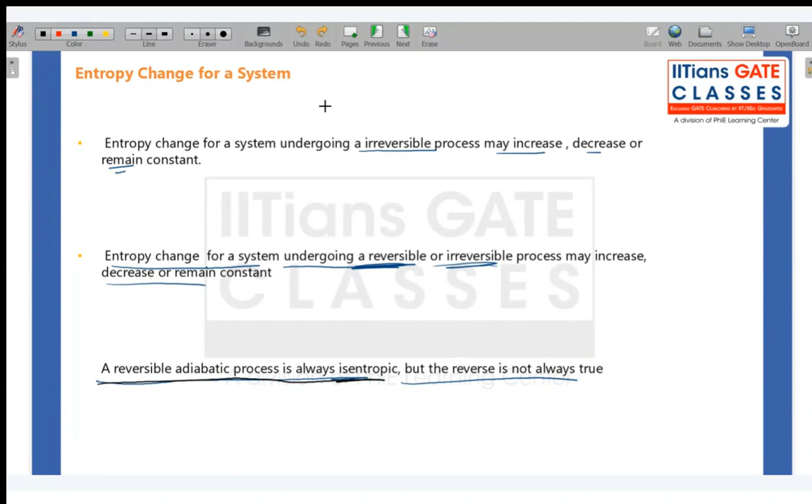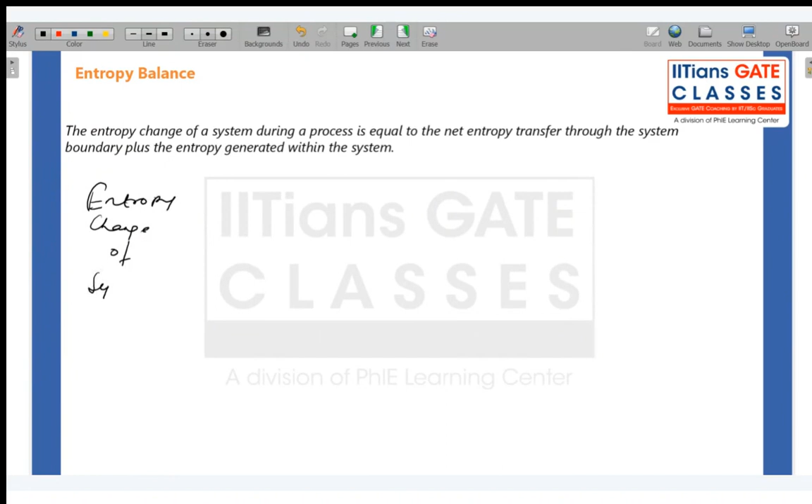So like we did energy balance, we will do entropy balance. Entropy change of the system during the process is equal to total entropy entering minus total entropy leaving plus entropy generated. So change of entropy of the system equals entropy in minus entropy out plus entropy generation. We can apply it to closed systems or open systems as well. Before that, entropy can be transferred to and from the system by two mechanisms: heat transfer and mass transfer.

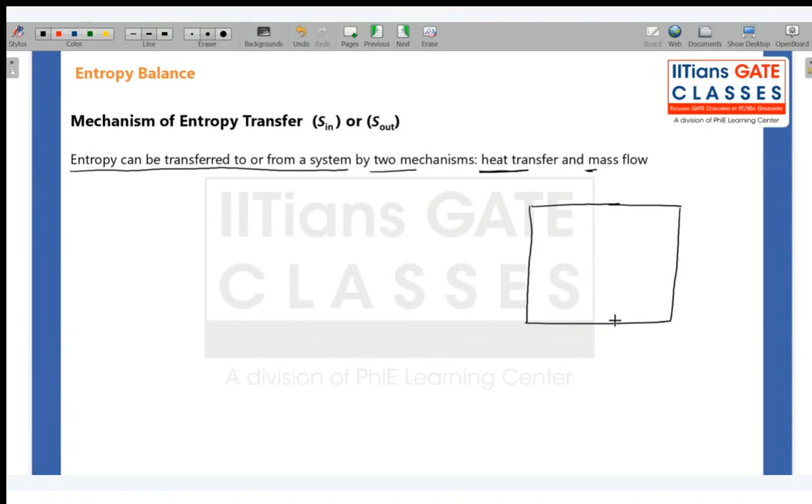Okay, so let us say you have a system. Some heat in is happening, Q out is happening, and some mass is coming in. So when mass is coming in, some entropy with mass will also come in. Similarly, when mass goes out, exit, entropy will also exit.

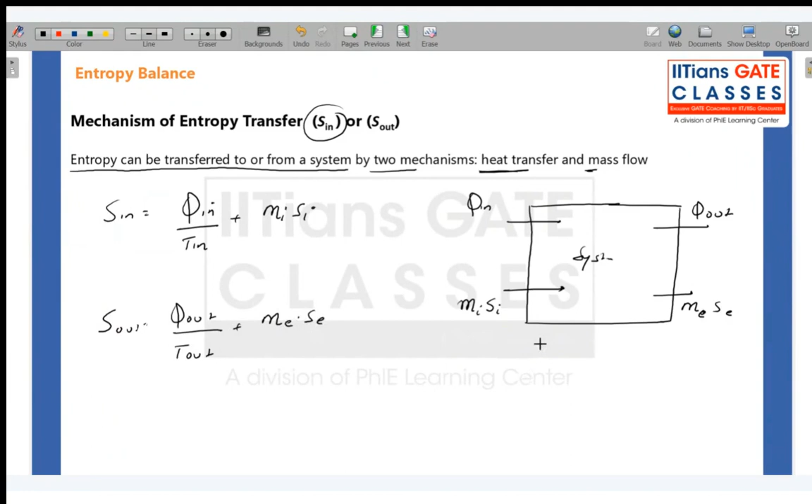So what is entropy in here? Entropy in equals Q in by T in plus Mi Si. What is entropy out? Q out by T out plus M exit S exit. So this is entropy in, entropy out.

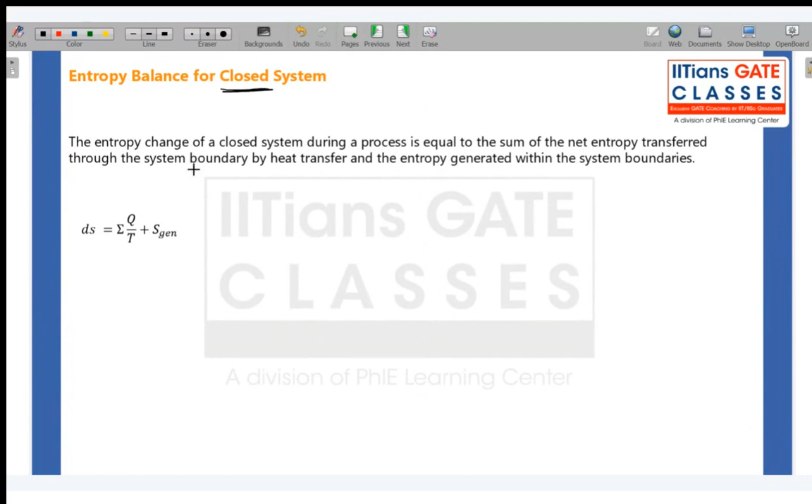So we can apply this entropy balance in a closed and open system. Entropy balance in a closed system - when we talk about closed system, mass flow rate is 0, no mass in, no mass exit. So change of entropy of the system equals entropy in minus entropy out plus entropy generation. So I can say Q in by T in minus Q out by T out plus entropy generation, the summation of Q by T plus entropy generation. Now this you can only use for closed system.

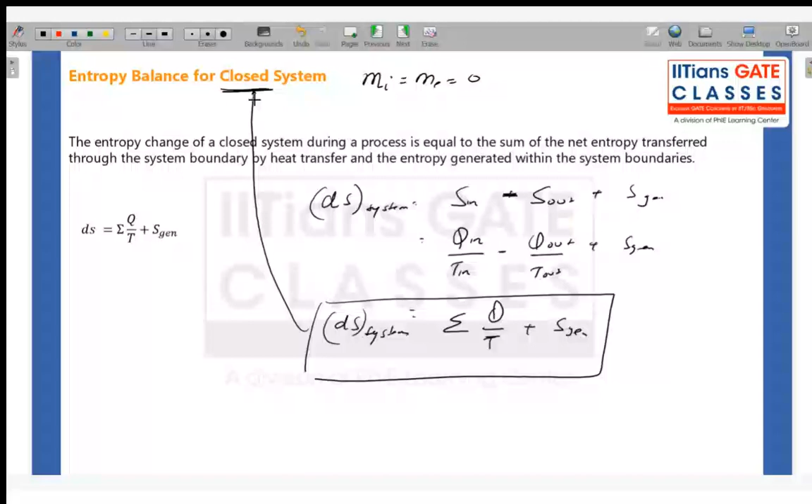Next is the same application, but for open system. So open system, you have mass flow rate as well. So you can write dS equals S in minus S out.

Plus entropy generation. So what is entropy in, in this case? Mi Si plus Q in by T in. Then it is M exit S exit minus Q out by T out plus entropy generation. So I can say summation, if there are more than one streams, plus summation of Q by T plus entropy generation. So this is for open system, entropy balance for open system.

Okay, so is it clear? Is it clear?

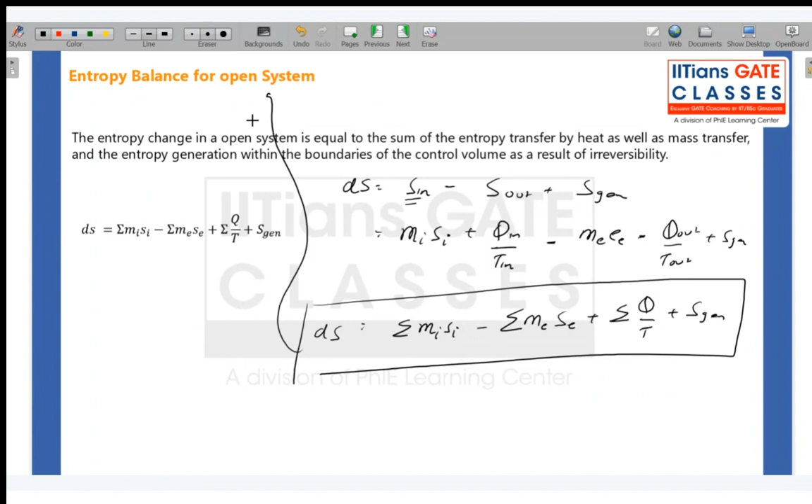Okay, so let us come to the last part of today's topic. I know there are so many formulas in entropy, and it could be a little confusing, but if you know when to use which formula, I think you can figure out the way to solve questions. Now, combined first and second law of thermodynamics.

So from first law, closed system, I hope you remember we defined dQ equals dU plus PdV. Now for open system, we define dQ equals dH minus VdP. And from second law, we have defined dS equals dQ by T.

So from here I can write dQ equals TdS. So now what can I do? I can substitute it here and here. So now I'm combining. This is first law, there's second law.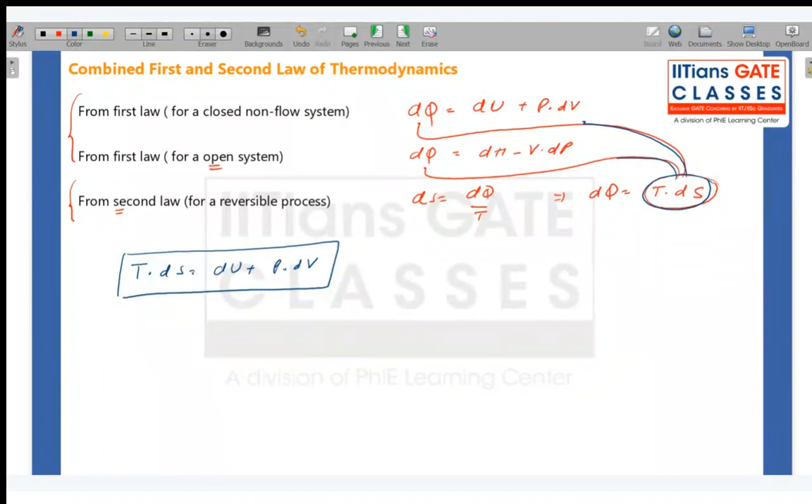If I combine first and second law, if I substitute this in the first equation, I can write TdS equals dU plus PdV. And if I substitute this in the second equation, I can write TdS equals dH minus VdP.

So this is valid for both reversible and irreversible process, but for closed system. And this is valid for both again, reversible and irreversible process, but it is only valid for open system. Now we will use this formula to do the same thing what we did in PV diagrams.

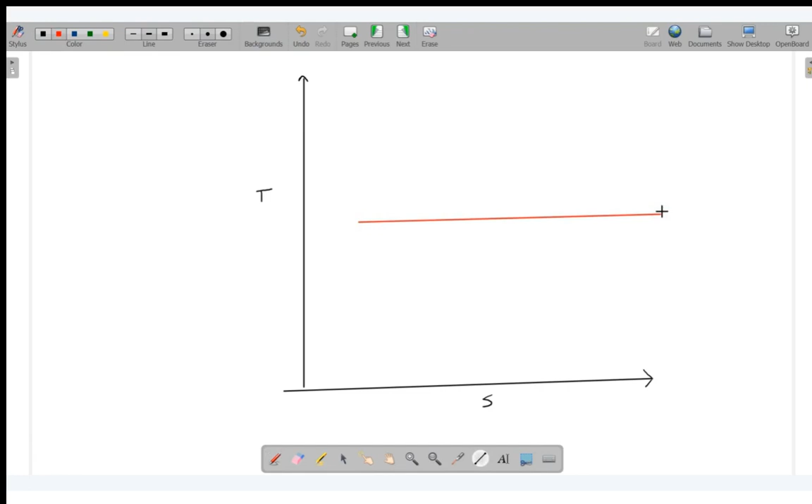So you see, in order to draw - this is my TS diagram. Now, can you tell me how can I draw a reversible isothermal process? A reversible isothermal process, can you tell me? Yes, horizontal line. So I can draw it like this. Here temperature is constant and slope is 0.

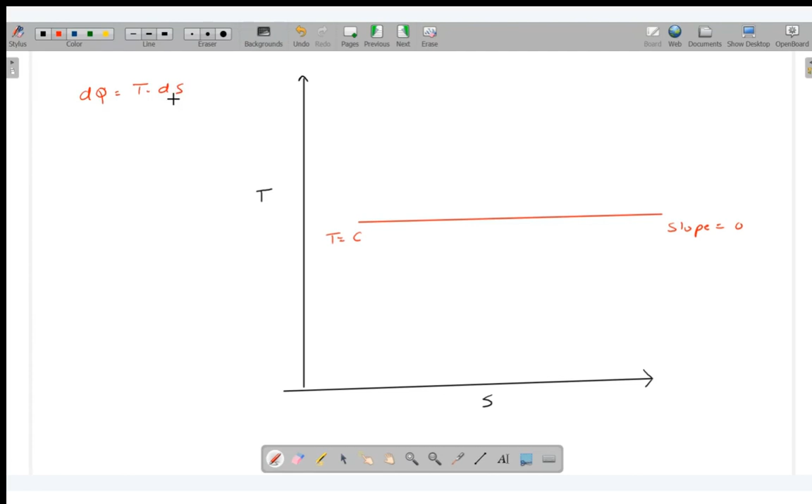And I can also explain this - parallel to entropy axis - by using dQ equals TdS. Can I explain this using this? Yeah, I can. So you see, what will be the change? What will be the slope here? It will be dT by dS, right? This will be the slope on a TS diagram. Dt by ds will be the slope. Now, because temperature is constant, numerator change in temperature will be equal to 0, and therefore slope is 0. I hope you remember, if we have a PV diagram, the slope is what? If you have y and x, slope is dy by dx. Similarly, when we had PV diagram, slope was dp by dv. Similarly, here the slope is dt by ds. So because temperature is constant, dt equals 0 and the slope is 0. So I can also explain it like this.

How about an isentropic curve? How can I draw isentropic? Vertical, yes. So this is what I can draw - entropy equals constant and the slope is infinite. So I can say slope, which equals dt by ds. Now here you see denominator is 0, so slope is infinite.

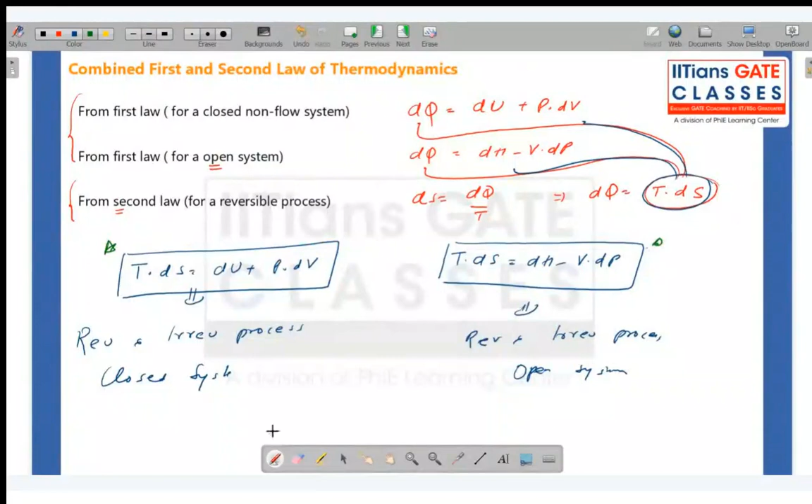I have no idea how to draw constant volume and constant pressure processes on a TS diagram. So how do I figure out? I need to calculate dT by dS for constant volume and dT by dS for constant pressure. I will do it using my combined first and second law equation. We just now defined these two equations, and now we are going to determine dT by dS.

Let's take this equation. For constant volume process, this term will be 0. So TdS equals dU, and TdS equals m Cv dT. So dT by dS equals T upon m Cv. Let us assume mass equals 1. So dT by dS equals T upon Cv. This is the slope of the constant volume process on a TS diagram.

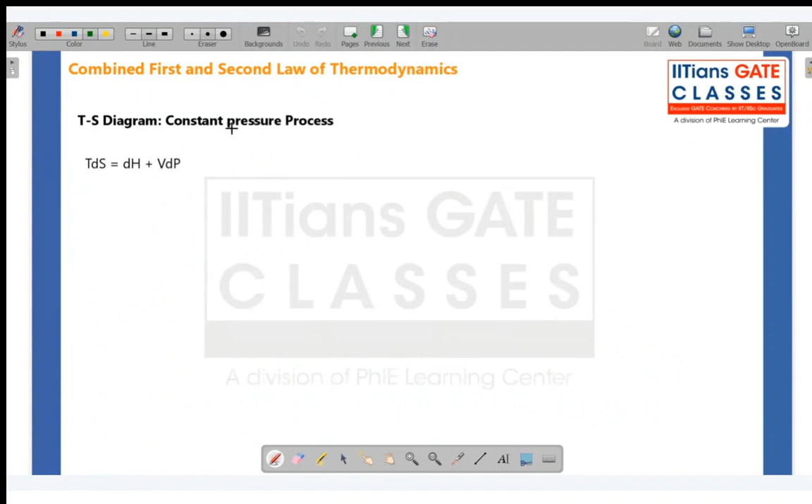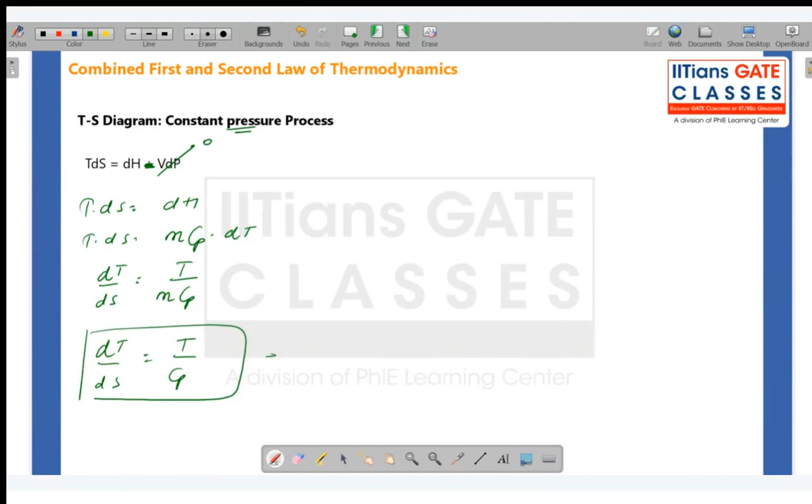How about constant pressure process? For constant pressure, I use my second equation: dH minus VdP. Here, VdP is 0. So TdS equals dH, and TdS equals m Cp dT. So dT by dS equals T upon m Cp. Let me take m equals 1, so dT by dS equals T upon Cp. This is the slope of the constant pressure process on a TS diagram.

So let's come back here. Now I got this slope, T upon Cv, and this one, T upon Cp. Now tell me which slope is higher, which is lower. Is the slope of constant volume higher or constant pressure higher? Constant volume is higher. Very nice, very good. As you can see, the numerator is the same, but Cp is greater than Cv. So because Cp is greater, the slope of constant volume will be higher and the slope of constant pressure will be lower.

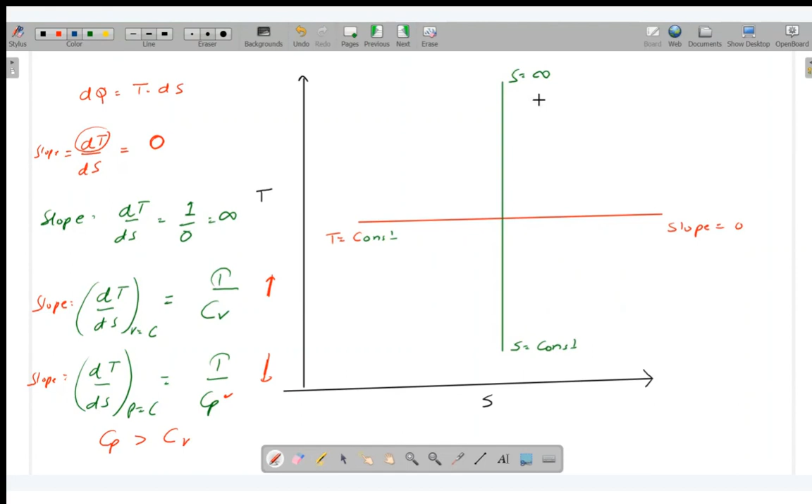So by this logic, can I draw the slope of constant volume as higher? If constant volume slope is higher, it should be close to the y-axis rather than the x-axis. So constant volume slope is higher, and I can draw it like this. This is constant volume, slope equals T upon Cv. Next, I draw constant pressure near the x-axis. This is pressure equals constant, with slope T upon Cp.

Now you can see the slope is increasing like this: 0, Cp, then this one, and then this one, and then infinite. It is increasing like this. So I can say slope of constant volume is greater than slope of constant pressure curve. I hope this is clear.

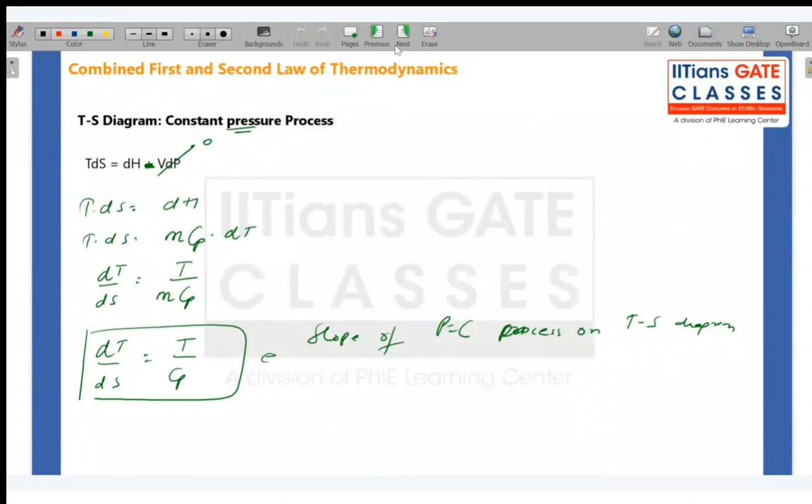So this is what we have written here: constant volume, constant pressure process. Whatever I wanted to explain here, I have explained on this diagram. This is how you can draw this diagram. Okay, you can leave it. Chalo, so again, I am really sorry. I need to cover so many formulas today, but there is no other way.

Let's go ahead and see what we have discussed in today's class. This, whatever we have discussed, I explained earlier. Then we combined the first and second law of thermodynamics and got these two equations. TdS, this one is valid for closed system, and this one is valid for open system. But they are both valid for reversible and irreversible processes. Why is it valid? Because temperature is a property, entropy is a property, internal energy is a property, pressure is a property, volume is a property. Every term in this equation is a property, and therefore it can be applied to any process, reversible or irreversible. Similarly, for this equation as well, everything is a property.

So now the slope of the constant volume curve on the TS diagram is this, and the slope of constant pressure, this is pressure.

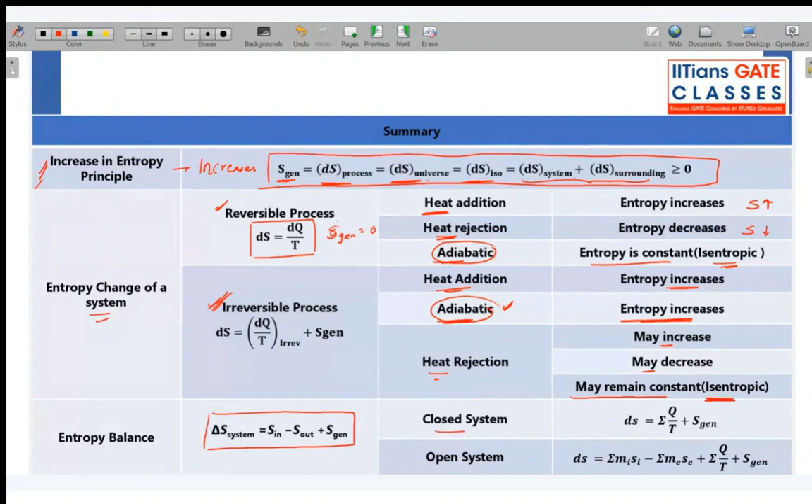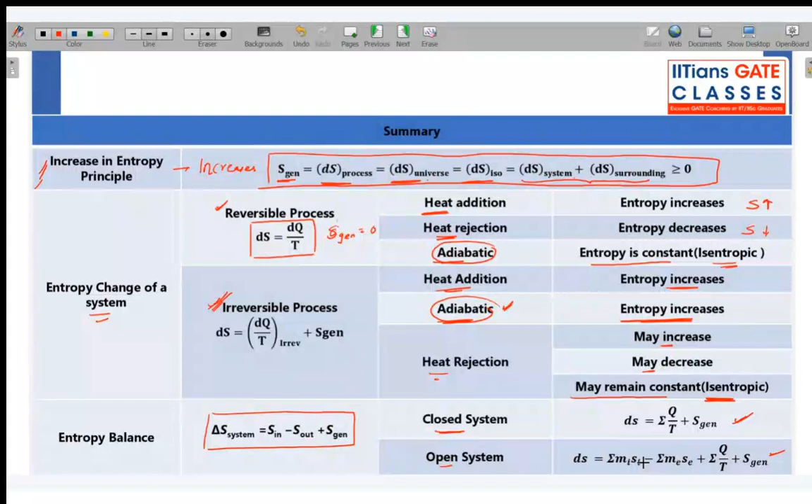Then we have seen entropy balance for closed system and open system - this is for closed system, this is for open system. So all in all, whatever formulas you thought, how will I remember them, how will I know which to apply and when - these two slides basically summarize everything.

You need to know where these formulas come from. For that, you need to practice, go through the lecture properly, and see how all the formulas are defined. Then, very clearly, I have mentioned: if you have a reversible and isothermal, use this; if non-isothermal and solid or liquid, use this; for ideal gas, you can use any of them; then you have these two formulas. I don't think I can make it simpler than this.

So try to go through the lecture, be very clear about how these formulas come and how we have defined them, then come back and try to solve some questions applying these. Try to identify these situations in the question: are we talking about a system, is it reversible or irreversible, and if irreversible, is it a solid, liquid, or gas? These are the things you need to work upon, and I think entropy would be a little easier for you.

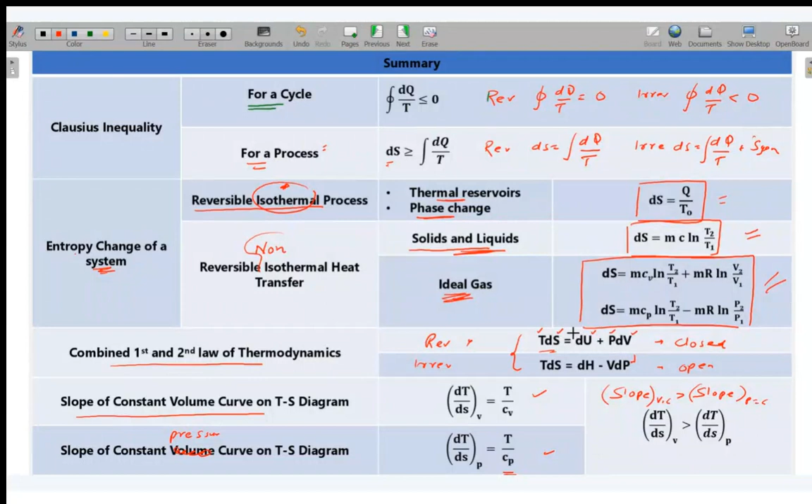Any doubt? Anyone, guys? Any doubt from today's class or earlier classes? Yes, no? If you have no doubts, then at least say no. If you have a doubt, ask me. Okay, so everything is clear? I taught so well, so perfectly, that you people have no doubt - or you have not studied anything, that's why you have no doubt.

Anyway, it doesn't matter. I have tried to give you the best, I've tried to explain. Yes, yes, sure Subhendra, no problem. Revise - that's why I am asking you to revise, so that in your next class you can ask whatever doubt you have and we can clear it then and there. I'm very happy to see that you people are revising and things are getting clear.